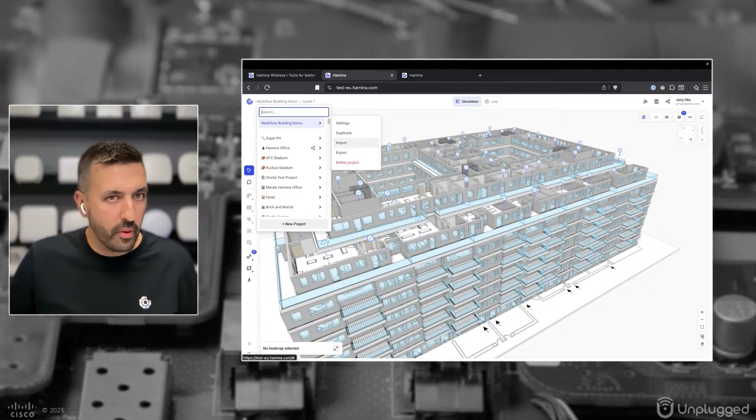Yeah, how about I share my screen instead of just talking about it, and I can show you some of the integrations we've got. To your point, we've had both on the import and export side for quite a while now, being able to import information from things like Cisco Meraki, but now we've added things like Catalyst Center as well, where we can pull in information from there. Probably what's most exciting is really on the live integration side.

Let me actually just do this—I'm going to start a new project here, and we're just going to show a quick demo of this latest and greatest integration. If I go to the live side, you can see we can tap into all these data sources from multiple vendors, but Meraki and Cisco specifically here. What I want to particularly show off is this latest integration with the Catalyst Center side.

This is actually our first integration with something that's not just in the cloud, right? So this is where things get pretty interesting, where we can tap into information from a Catalyst Center deployment and be able to pull in all sorts of information. I've already got this plugged in, but I'll go ahead and pull in a site here, and let's take a look at one that'll have some live deployment.

So this is a real live deployment. In addition to that, I'll also pull in my Orb integration here, as we do have some additional insights that we can pull in from Orb now. Not only that—one of the things that's unique with Hamina is maybe you already have access to something like the information that's in Catalyst Center, but we also want to pull in information from other data sources, like some type of sensors that can also be overlaid into these heat maps.

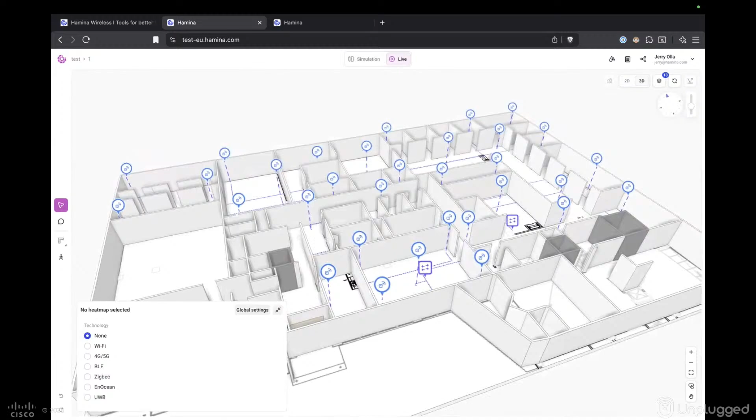So the floor plan lived in Catalyst Center. We pulled that in over the APIs, and now we can start using kind of the Hamina magic, if you will, to start building very detailed heat maps based on those floor plans.

So you can see all the different... and you mentioned this once before, that could just be a JPEG, right? It doesn't have to be a detailed CAD drawing or anything like that, right?

Absolutely. So this is kind of the different side of it—this is already an existing deployment, but we could do the same thing on the design side of things too, to actually do the initial design. But since this is already deployed, maybe we want to start from this angle of, okay, where are the gaps? Where are the issues? Where are users having a poor user experience? And we can drill down all the way into that level as well.

So if I go to the live clients, I can actually see we do have some clients connected to the network right now. And notice this one here in particular even has a score associated with it—that's coming from that Orb integration.

So if the clients themselves are running the Orb agent or Orb application, we can get some additional insights from what that user experiences from an actual user quality perspective. It gives a quality score of the connection - not just how the Wi-Fi is performing, but how the internet is performing at that site. We can take all that together and aggregate it down into a score.

But if I take this client, for example, this Chromecast, we can see this client is experiencing poor performance due to high retries. So we're seeing all that, and again, we're learning all this information in real time from this Catalyst Center deployment. This is a live deployment with actual Wi-Fi clients connected, and this is how that client is being reported to us by the infrastructure, in this case by Catalyst Center.

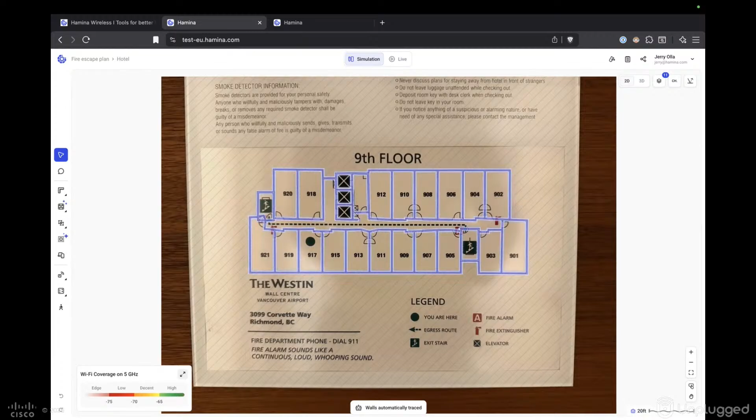Check this out - if I just pull this in, it understands it. In the past, not that long ago, you needed to have some very complex floor plans with layers and CAD files, all the PDF layers. Now, even just a photo of a fire escape plan provides the same kind of results in the sense that it interprets that as a floor plan. It understands that object is an elevator, that object is a door, that object is a wall. So literally just with my iPhone, I took a picture of the back of my hotel room door, dragged and dropped it into here, and you can see that quickly I'm ready to start simulating RF and placing access points, seeing how different objects and different placement of that access point is going to impact the signal propagation.

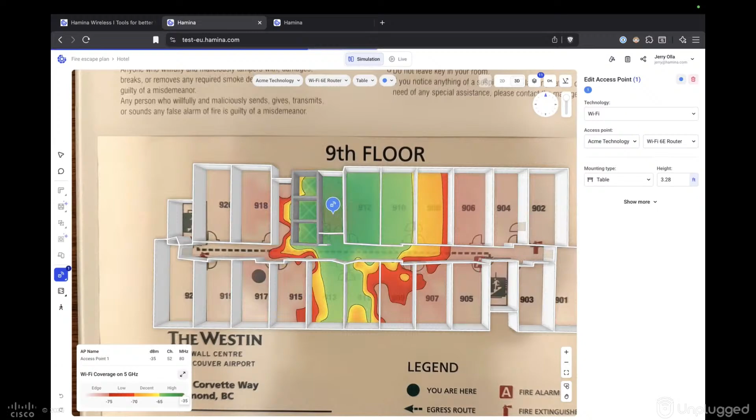Look at that, it looks like it even got the elevators and the materials, yeah, exactly. Pretty impressive. And you can see how impactful those elevators are to attenuation in your design.

And you know what, this is a great example because this happens - I've done this before, using the fire plan because you don't always have good CAD drawings or something like that. You'd be surprised how many people don't have those drawings or those files. Yep, agreed.

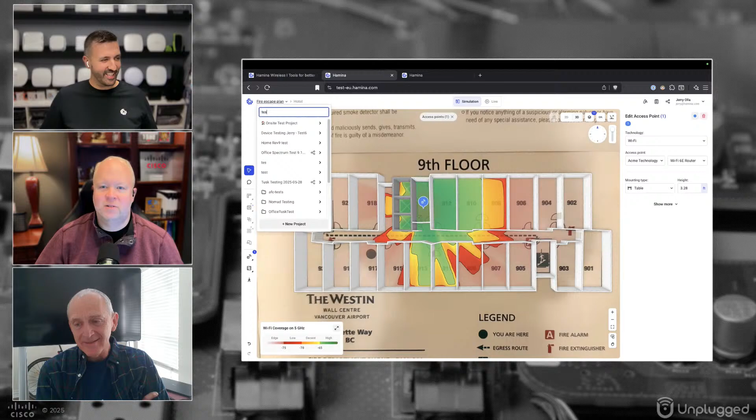So let's say we take our live data. Everything's working fine at the site, but we want to simulate making some changes, maybe from a refresh standpoint, maybe adding some new technology, like exploring using ultra wideband here for location tracking, or maybe a private cellular.

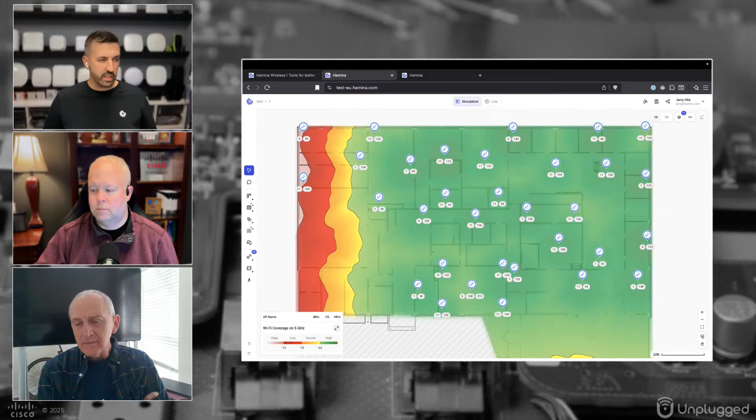The cool part is all of this information we've learned about this site, we can now use to do all sorts of things. I like to call it the sandbox. So we can go from the live view to now the simulation, and we're playing in the sandbox. We can do really whatever we want.

We can get creative. Our existing AP model right now, we've got some older 3802Is. Maybe we want to simulate swapping those out with something that has a UWB radio. Right now, if I look at our UWB coverage, we don't have any, because we don't have any technology that supports UWB in the space. But what if we just simulate ripping everything out and replacing it with some new ones.

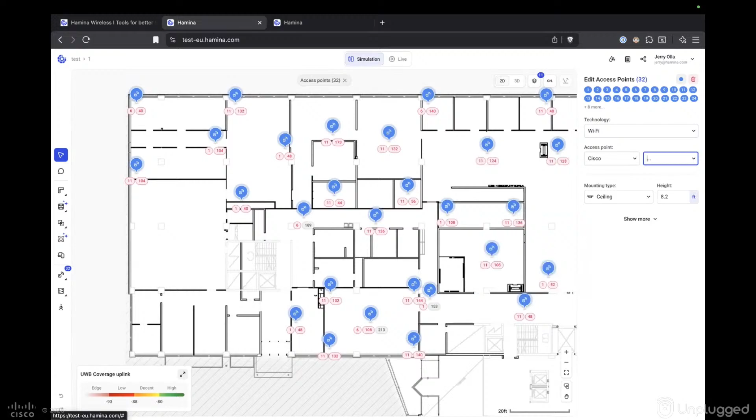9178s. And as soon as we put in 9178s, look at that. Now all of a sudden we have UWB coverage, and actually pretty decent UWB coverage throughout this facility. If we just do a rip and replace, we can get some pretty good ultra wideband coverage, and now we have a whole new technology we can use.

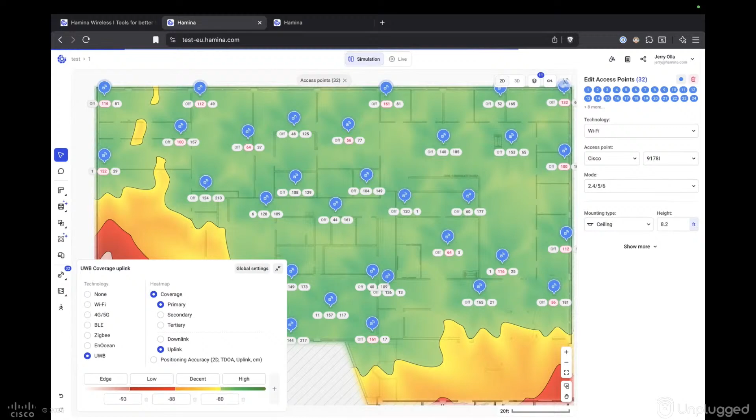One of the other things we can visualize is the positioning accuracy. Most likely, if you're utilizing something like ultra wideband, you're going to want to get down to that centimeter level positioning accuracy for some type of tracking. And now we can actually see that.

Based on the density of the access points we have in this environment and how open it is, we can see we can get centimeter level accuracy in all the areas where it's green.

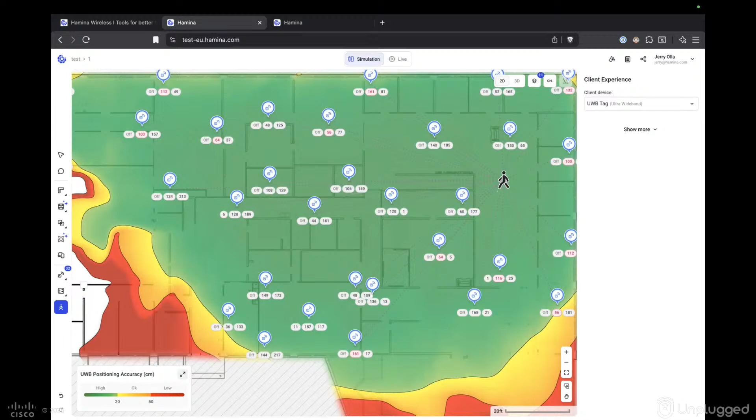And if we want to visualize that even further, let's throw in a UWB tag to simulate what that looks like from a triangulation standpoint, as far as how many different anchors it's going to be able to hear.

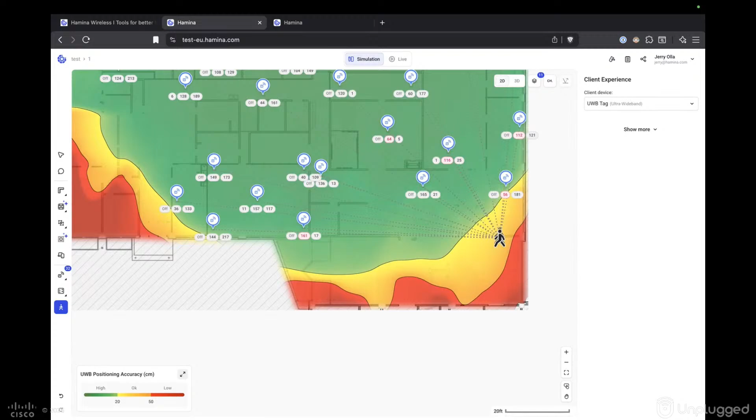And what happens when this device, whatever it is we're tracking, moves into an area where we don't have as many APs audible, we can start to see this ghosting effect happening with our tag, to see how much variance we'll see in that location and how that drift starts to happen in these areas.

So if we really need that location accuracy in this part of the building, we can simulate adding an additional 9178 into this area to help improve location accuracy, all the way down into this corner of the building.

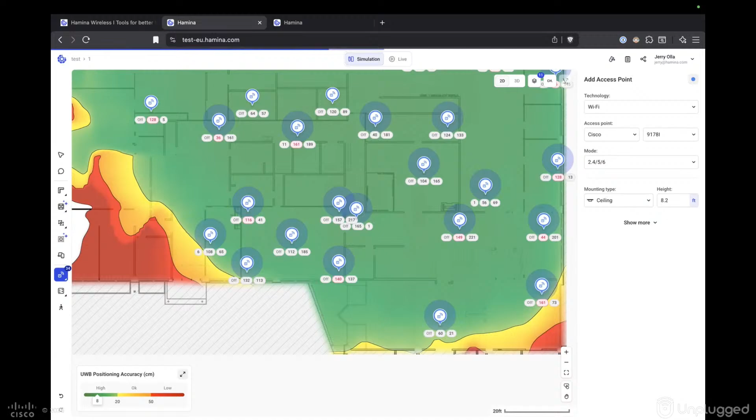But typically, if you haven't worked with UWB, what I've heard is you want to have at least, very minimum, 3 anchors audible in each of these areas, line of sight audible, and then 4 or more is optimal for really good location accuracy.

So yeah, something to keep in mind if you're going to start considering some of these newer technologies and looking at wanting to simulate that.

The cool part is we're playing in the sandbox. We can do whatever we want here. It's not costing us anything. We're not ordering equipment at this point. We're figuring out what it's going to take.

We can very quickly create a bill of materials and figure out exactly how many access points it's going to take. And in addition, we could input where our switch locations are, and start connecting everything to our switches to figure out how much cabling and things like that we're going to need as well.

If I do a connection to our switch, we can quickly see how much power we're going to need, how much cable we're going to need for this project. All that gets added up into that bill of materials as part of that process.

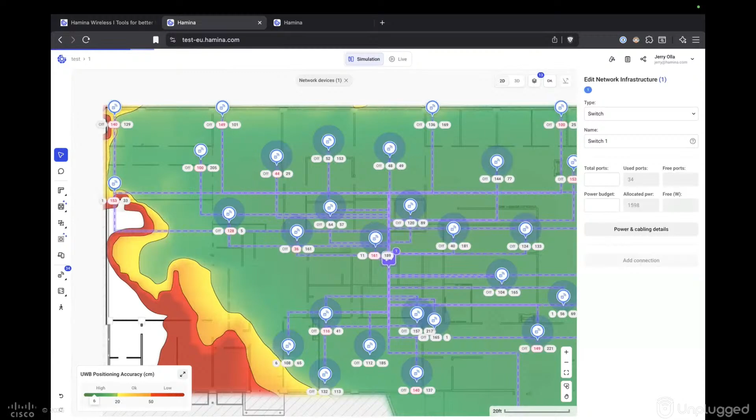So very, very quickly we can run through multiple scenarios. UWB is one consideration, but maybe you're considering BLE technology for that location. Does that get us enough location accuracy? Do we get tertiary coverage? All those kinds of details.

But then, yeah, even things like Zigbee. What about private cellular? I know, Al, we've talked about private cellular before. Is that something that you guys are seeing?

Yeah, we have an offering. Cisco's an offering. It's a hosted offering, where you own the core part, and then we host all of the management of the network, or our partners do. We see that as a really complementary technology to Wi-Fi. In the early days it was sort of like, hey, it's going to be one or the other. It's like, no, they're completely separate use cases.

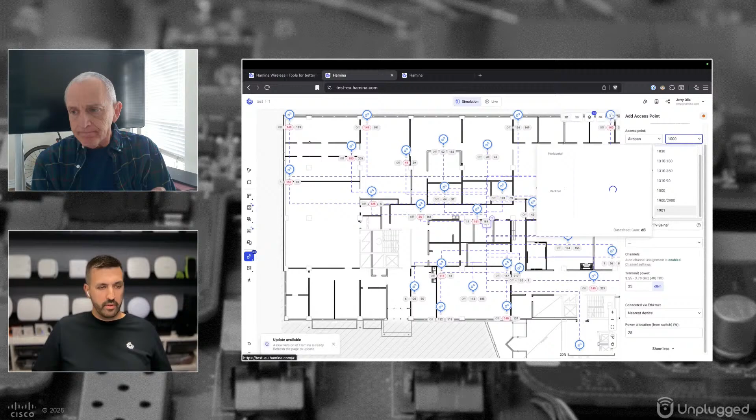I'm curious what you guys are seeing on that. What I've been seeing is, I totally agree, it's complementary. A lot of times it's because the Wi-Fi is so heavily utilized. Where can we get some additional spectrum? And not just additional spectrum, where can we get a QoS type Wi-Fi connectivity, something that can guarantee a certain performance and reliability, where Wi-Fi, being unlicensed, has to contend with all this other technology in that space. You don't always have full control over that, where something like private cellular, it's wireless, but it's not Wi-Fi. It's this kind of soft licensed frequency where you have more control.

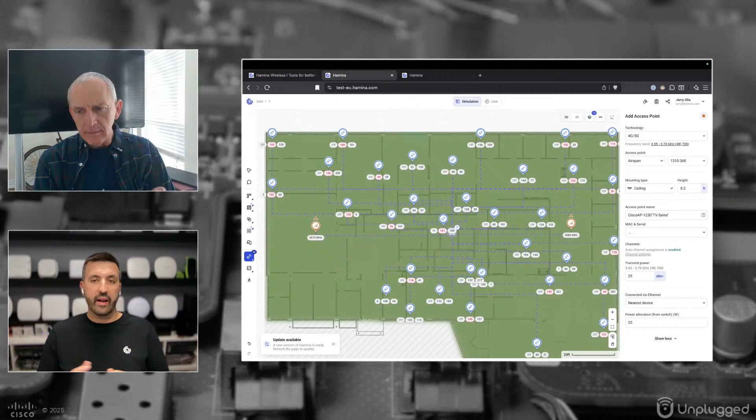You can kind of guarantee a certain quality of service with that wireless connectivity. So thinking of something like a point of sale system, you may want to offload it from the Wi-Fi side to private cellular while keeping your guest users, laptops, and things like that on the Wi-Fi side. Yeah, exactly. We see this in medical areas, large public venues, sort of things like that you were talking about.

Yeah, and I think what's pretty cool is when we add in all the walls and doors and everything like that here, you'll see when I place a cellular radio, the coverage of one cellular radio in comparison to one Wi-Fi radio. In this environment, one cellular radio covers about the same as probably 6 to 8 Wi-Fi radios.

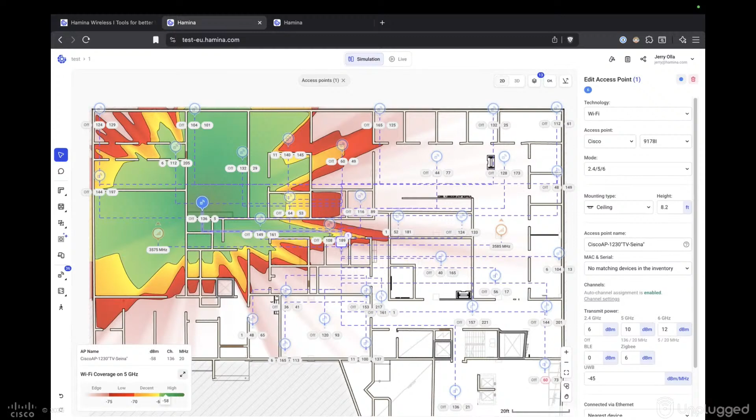And obviously with Wi-Fi, we're designing for different things. We're designing for capacity, not so much coverage. But usually with cellular, because we're going to have a lot fewer clients on the cellular side, we tend to design more for coverage than for capacity. So it's not like you're doubling up the number of devices in the environment to provide both private cellular and Wi-Fi. It might just take a couple of private cellular radios depending on the space you're covering.

And now you get a whole additional chunk of spectrum that you can dedicate for those certain critical devices. What I like about this is, somebody's looking at it saying, well, what would it take to do this? You can place these on the map in a matter of minutes and get an idea about what it would take. Once you've set up this project, as I've shown here, you're talking very few clicks, very few minutes, if anything, to get it set up. And once it's set up, you can simulate these different technologies really quickly to figure out the exact right solution before you go through any costly expenses of running cable and hanging equipment, then realizing it's not the right solution or we need to add private cellular later on. You can figure all this out on the front end.

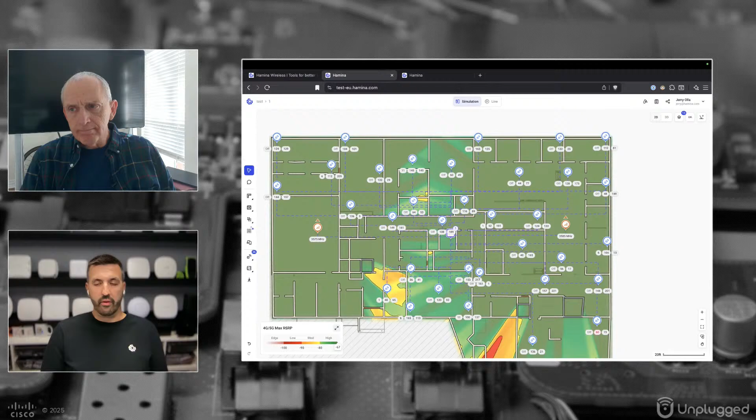We had a couple questions on a couple things we've covered already. How do you connect Hamina to Catalyst Center? Is that process quick, or can we talk about that a little bit? It is pretty simple.

So to get Hamina to talk to Catalyst Center, it talks directly to Catalyst Center over an IP address. We do have documentation about ports and IPs that you need to allow to talk to your Catalyst Center. Then it's just a username and password to allow that communication and the API connection to happen between Hamina and Catalyst Center.

On the Meraki side, it's even more straightforward, being that Meraki is in the cloud. You're talking literally just a dashboard API key. So you generate that dashboard API key from your Meraki account, choose which region you're on, and you're good to go. Very straightforward. When it's cloud to cloud talking, it makes things very easy. When you've got to go cloud to something local, then there's probably some firewall rules and things like that that have to be implemented to allow those IPs to talk to your instance.

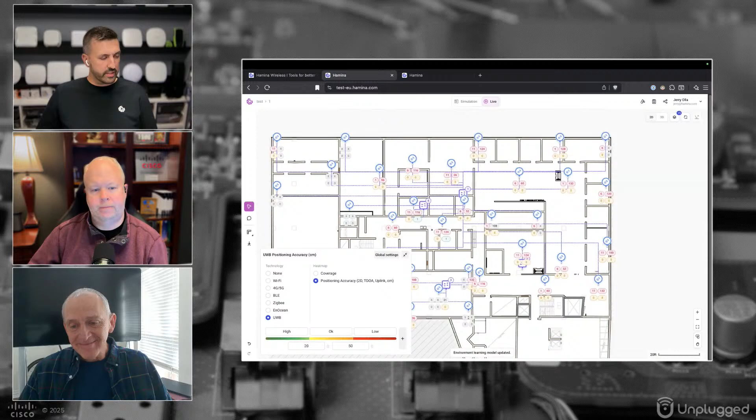Good question. So if we come into here, we can look at this from coverage or for positioning accuracy. Going back over to the simulation side, if we go into our channel settings, we can go under ultra wideband to choose those different frequencies. So we do support channel 5 as well as channel 9 that you can simulate.

Let's actually see if we switch from channel 5, which is using about 6.5 gigahertz, to channel 9, being on almost 8 gigahertz. Let's see how that does change things. And you can see, going from 6.5 gigahertz up to 8 gigahertz does make a pretty significant difference as far as coverage goes, as well as for positioning accuracy.

So there is some consideration there about which frequency, which channels you're going to be using, depending on the technology, depending on the tags, what they support, those kind of things. So yes, you can simulate those different supported frequencies.

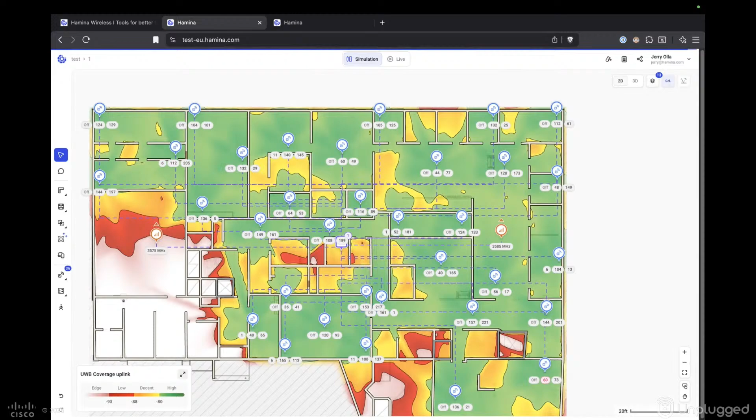Nice thing is it's out of band, so it's not interfering with your Wi-Fi at all. But the bad thing is propagation loss is a little bit more.

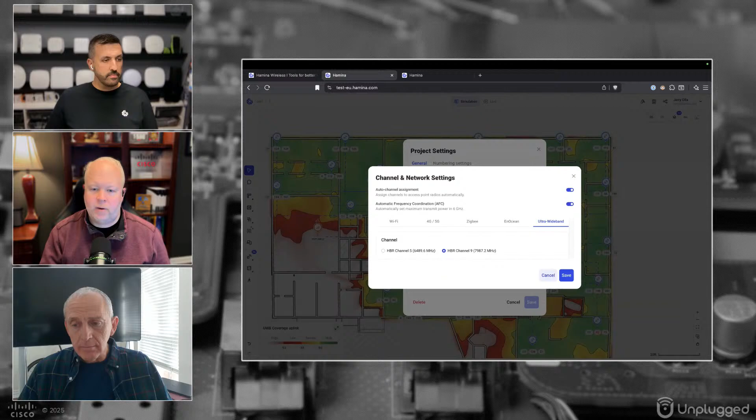Just to be clear then, the Cisco APs that include UWB, are they covering both bands? I'm only aware of the higher band. After seeing this, now I'm thinking I need to go back and look at the data again and see if I've got the data sheet right, and make sure that's the case. But I was aware of it being the higher band. That's a good question.

I suppose it probably depends on both the vendor side, making sure it supports which frequencies, and also on the tag side, which frequencies does the tag support.

Great question, I learn something new every time here. Oh, me too. We'll find out and let the listeners know, and maybe we'll open up the next show and let them know at the very beginning. Well, we can put it in the show notes too, under the episode.

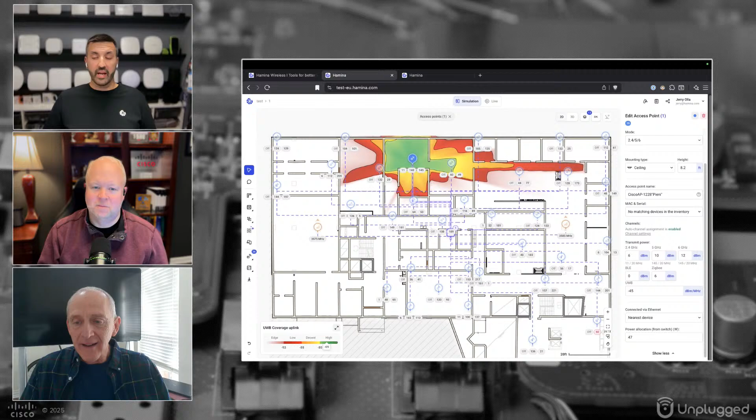Yep, sounds good. What I've found with UWB though is, because of this high frequency, it is very much like line of sight. If you have a lot of walls and doors and things like that, it's not going to penetrate through that kind of stuff. You need to have a very high density of access points with these anchors, and they all need to be, for the most part, line of sight with each other, because as soon as that especially 8 gigahertz signal passes through one of these walls or objects, there's not much coming through the other side.

Where I see UWB, it's more targeted. In other words, I don't need centimeter accuracy walking down the hallway, right? But I may need centimeter accuracy if I'm trying to gauge something from a manufacturing standpoint.

A use case is like if nurses or doctors going into the OR have to scrub for a certain amount of time, I can document that with that sort of level of accuracy. There are things that can be documented that need that precision, but not everything needs centimeter kind of precision.

You can adjust that as well in the requirements here. If you do have a specific level of accuracy, these thresholds define it: anything green is within 20 centimeters of accuracy, 20 to 50 is yellow to orange, and anything above that 50 starts to go into red. But if you don't need that level of accuracy, you can adjust these knobs.

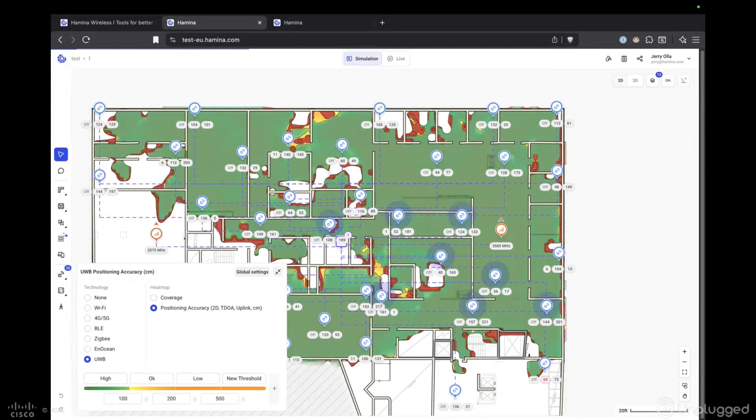So if we were to increase this to like 200, and let's say 100, you can see kind of what that ends up looking like. That's cool, yeah, this is a lot of fun to play with.

Because you have to be a little bit more precise with this. You're saying, hey, I want that level of coverage in this area or that level of accuracy in this area, and you have to be a little more precise with placing your APs. Wi-Fi maybe is a little bit more forgiving - you can move it to that side of the room or this side and still cover the whole room. But ultra wideband, you got to be a lot more conscious about where you want that higher level of coverage.

I like that it's fun to play with, because that's what I've been having a lot of fun playing around with UWB. I'm not a UWB expert by any means, but I think it's a very interesting, very new technology, and coming from a Wi-Fi background, it's interesting to see the similarities and major differences when you start dealing with these higher frequency technologies and location accuracy.

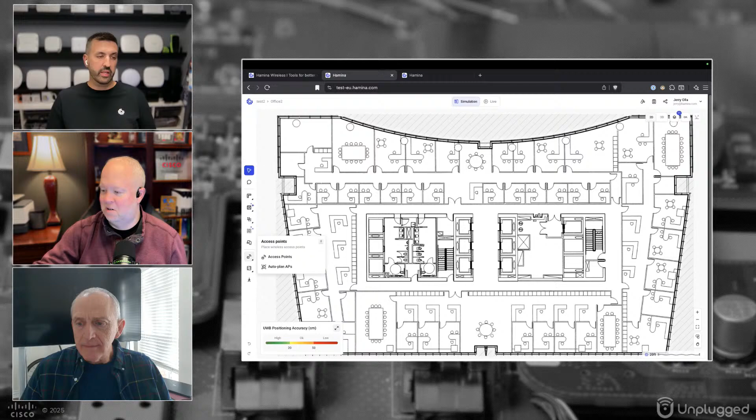I think that's what's really powerful about a tool like this - you can simulate and play around in the sandbox to figure out, hey, is this at all in the realm of possibility from a budgeting standpoint or anything like that. Very quickly you can start to really understand that technology and visualize it.

Let's do a quick design of this office type environment with some elevators and a lot of rooms to show you that point. I'll use the 9178s because I want that UWB radio, and let's design this for good Wi-Fi coverage. So right now this is simulating a good Wi-Fi deployment - we have good Wi-Fi everywhere, good seamless roaming throughout this environment.

What does that look like when we go and look at UWB for something like positioning accuracy? You can see, in a very walled environment with elevators and all that kind of stuff, you're not going to be able to just rip and replace your Wi-Fi APs with 9178s and get location-based accuracy. You can see how bad that would be from a centimeter level kind of accuracy.

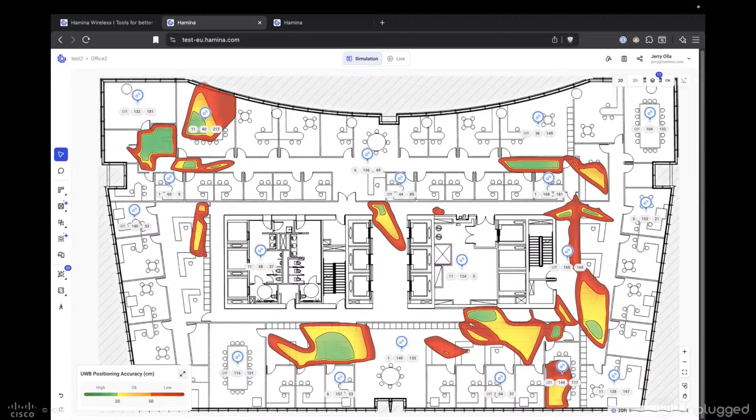Now if we look at it from a Bluetooth standpoint, for something like tertiary coverage, we actually don't look too bad. This is like what we've been designing for as far as location stuff for a while now, and this might be good enough - maybe you don't need UWB, or just a few more access points, maybe. Not a big difference in the design, right? Depends on the use case.

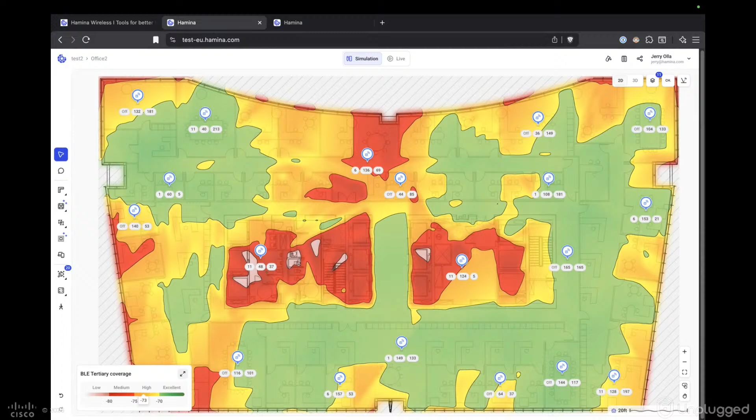Yeah, it's fun to play with. Remember when you guys first released it as a beta feature? I went to it right away because it was a lot of fun to play with. Yeah.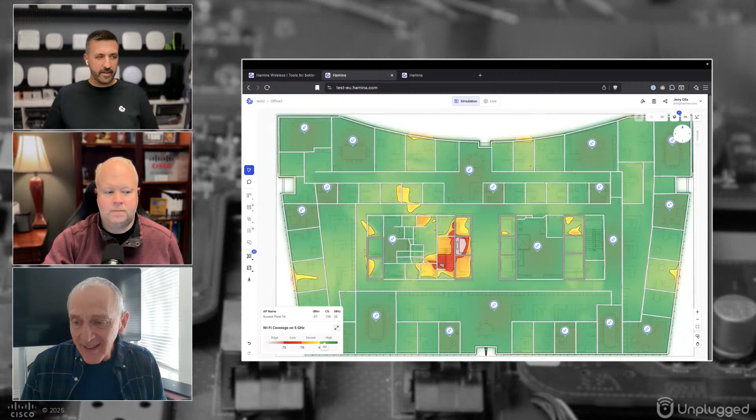I could show you a couple other scenarios on the AI detection features and show you some of the latest and greatest there, if there's interest, or I don't know if we have any other questions before I change gears here. Yeah, that sounds good. I don't see any other questions right now. Okay, let's do this then.

So I want to show you guys some of the latest and greatest in the AI detection side of Hamina. We showed walls, doors and objects, but some of the other things we've added is like we'll do a data center. If we choose data center here as the environment type, that's going to tune that AI detection to look for specific things related to that.

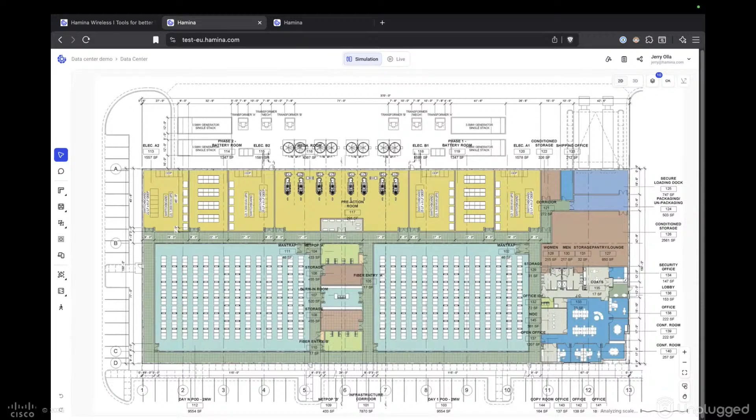So now if I come in here and grab our data center floor plan — again, these are just floor plans, just Google search for data center floor plan, nothing special about these. Really any floor plan works for this. These are not layered floor plans, they're not CAD files or nothing like that.

But it's one of the first things you'll notice it did. If you're paying attention, you can see these little notifications of all the stuff it's detecting. The first thing in the bottom right corner — I'll make the text a little bigger — you can see it detected the scale automatically. So once it does that, it has a good reference of what it's looking at from an object standpoint, once it knows the size and scale of this stuff.

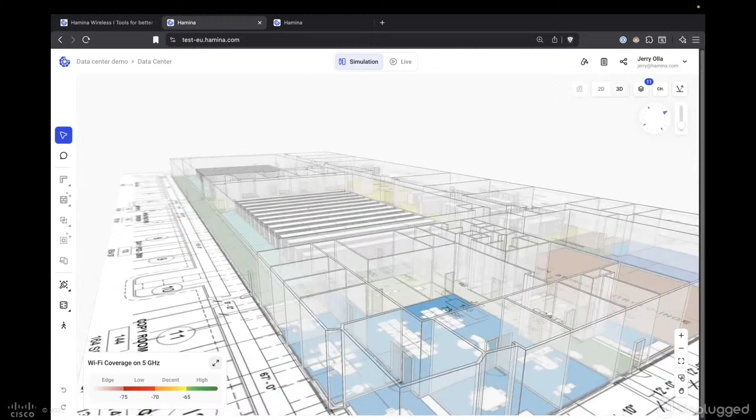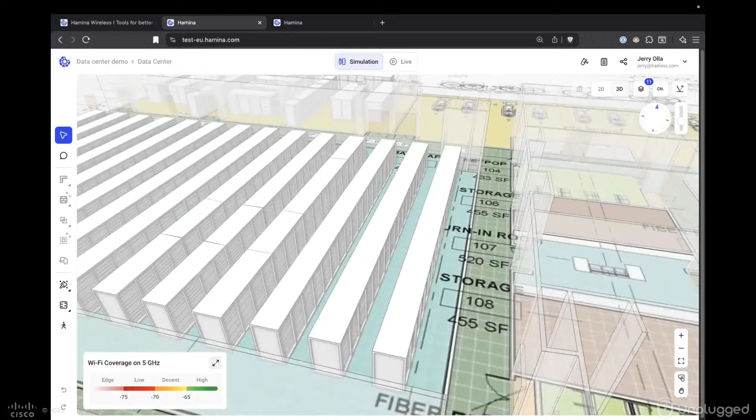Now if I go into the 3D view, you can really get a grasp for what all it's picking up. We can see it detected things like walls and doors like we already looked at, but one of the other things it detected was all the racking in here for the server racks, right? So obviously stuff you would commonly have in a data center. It's also appropriately sizing these to what a typical rack height would be for these kinds of environments. So it has a lot of intelligence in that sense of knowing what the default height and attenuation and things like that are for these kind of objects.

And really that quickly, all I did was create the project, drag and drop the floor plan in, or selected it from my list. And from there, if I want to just start placing access points, we can actually start to see how these access points are going to interact with this type of environment.

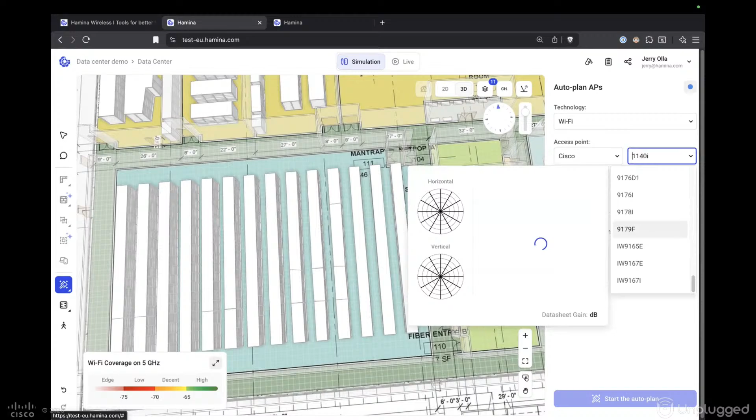And maybe even from there, if I don't want to manually place them, we could do the auto plan. Again, choose your specific model AP that you want to plan for, and you just hit start the auto-plan. And now it's going to go through and again use some intelligence understanding these objects of where's going to be some good places to place these access points.

By default, it's going to use industry best practices for looking at things like how do we make this network make sure there's going to be seamless roaming throughout the environment, as well as making sure there's good redundancy — meaning if any of these APs were to go offline for whatever reason, or maybe become overloaded with too many users, making sure there's at least 2 or more access points in any of these areas to ensure a good seamless experience for any type of users, whether they're stationary or roaming through the environment.

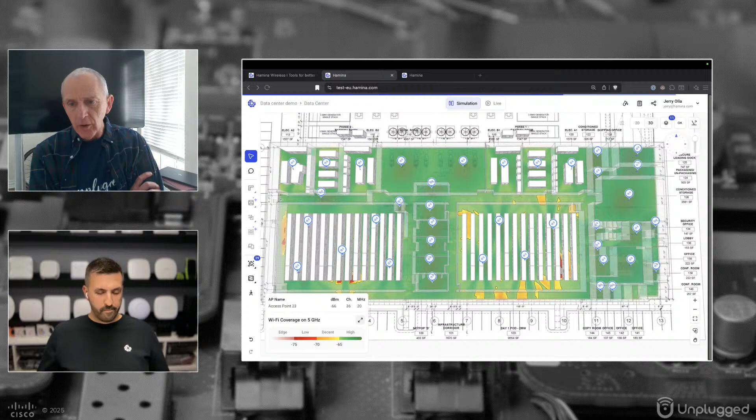How do you typically use this? Is this a fire and forget kind of thing, or do you typically say, hey, this is a good starting point for me, now I may need to add some, because it wouldn't necessarily... Let's say this was an area where you had a ticketing area or something like that, like you were talking about earlier — it may not know that, right? So you may want to augment. Is that how? I don't know, what do you think? Is it?

Yeah, no, I would totally agree. I usually use this as a good starting point — for very few clicks, very little effort, I now have a rough order of magnitude of how many access points it's going to take for this type of a project. But no, this is not like print this off and hand it to an installer and say go install these APs in this location.

There's still some checks and balances that need to happen here. I haven't even figured out how we're going to cable all this, how we're going to power all this. We need to factor in all those details still.

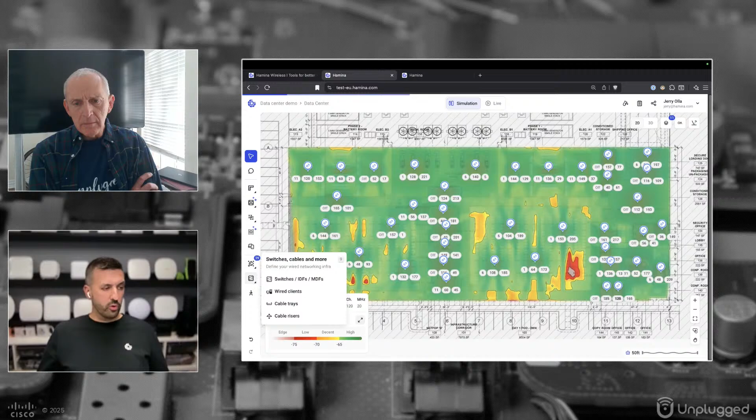But this at least gives me a very quick way to get a good feel for budgeting purposes, to see if this is in the realm of possibility before we go through and do a lot of engineering effort on this. But the cool part is once we're good with this, maybe there's a critical area that it missed.

Let's say this is some really high density area. We're going to be having some event, this is the event space or something like that over here, so I want to factor that in as well. I'm going to come in here and define a capacity zone, and we're just going to say we have like 150 iPhones and 100 MacBooks, just to put some numbers in here.

Now what I can do is just click and drag an area and say I just dropped 250 clients to all connect to the network in that area. And now that we've added that additional detail, this is not going to fly, right?

We've got over 100 clients connecting on our 5 gigahertz radio here. We do have only 39 on our 6 gigahertz, so the 6 gigahertz clients will be happy and okay, but any clients that are going to require to be on 5 gigahertz are not going to have a great experience.

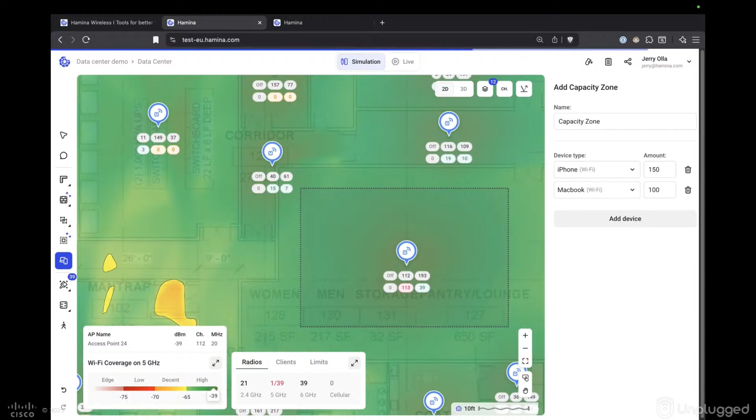So some things we could do is come in here and see if maybe we have a better mode we could put this AP in. Since we've got a 9176, it does support a 5-5-6 mode. So instead of right now, it's actually switched off and suggesting we disable the 2.4 radio, we've got a whole nother radio in this AP that we could be utilizing to help with that load balancing. Just by flipping this into a 5-5-6, we can see now we've got some better distribution of these clients.

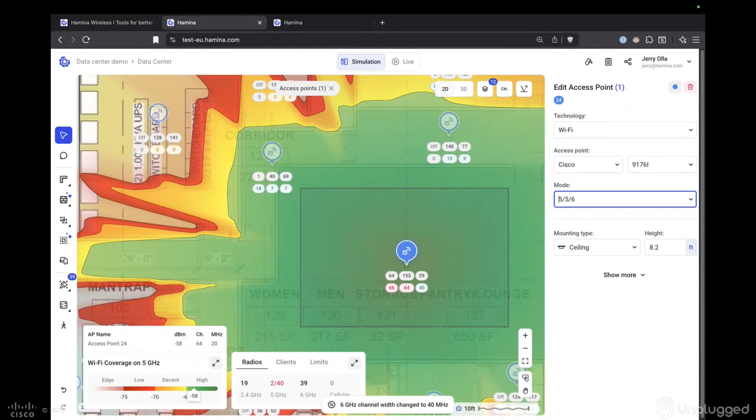You can see some of them moving around now. And maybe we want to do that with some of these other APs nearby that are going to support that. We'll put this one also in a 5-5-6, this one also, to get some of those 5 gigahertz clients. And now things are starting to look a lot better, but we're still over 60 clients here.

So let's go ahead and maybe add one more AP to this area. And I bet you, especially if we have one more AP and we kind of spread these out a little bit, looks like this is going to work nice right here.

So you can see it's rebalancing all the channels for me automatically. It's looking at what's going to be the most optimal way to configure the channels, the channel width, all this kind of stuff. Notice here, it did pick 20 megahertz channels for 5 gigahertz, but it does say we can use actually 40 megahertz wide channels on 6 gigahertz.

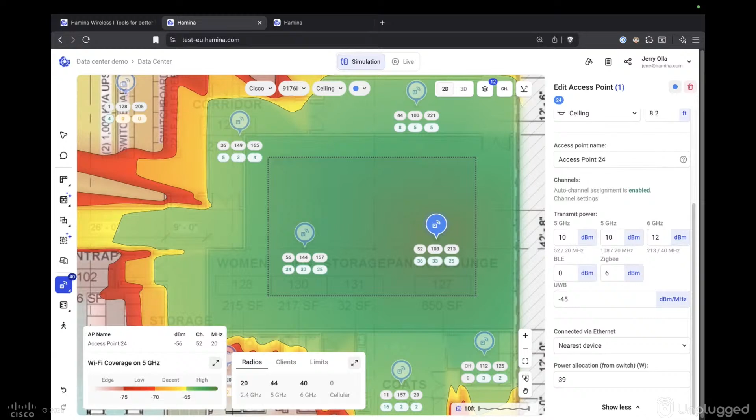It will automatically and dynamically, as I add more APs, you'll see eventually we'll get to a tipping point where it's recalculating the channels here. It's going to say we don't have enough spectrum on even 6 gigahertz to support 40 megahertz wide channels, and eventually it's going to drop down to using only 20 megahertz channels on 6 gigahertz as well. Let's see once it finishes recalculating the channels here. There you go, so 6 gigahertz channels now are switched down to 20 megahertz. That's all part of the auto channel assignment.

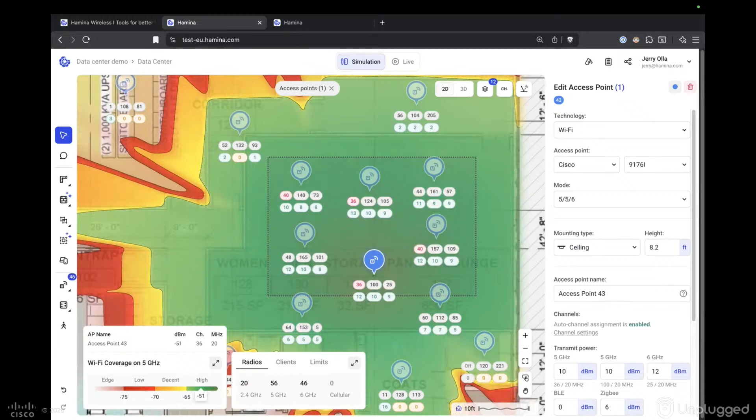So it's going to give you some suggestions on how you should optimally configure that deployment depending on how many APs and the environment and how separated they are.

We have a question also on multi-floor designs. So probably in a data center design, that's probably a single floor building, but office space or whatever, where we've got multi-floor, how do we handle that?

Absolutely, yeah, so we've had multi-floor in the tool for a while. One of the things that we can do is just stack those floors up. So I've got an 8-story building here, and we can stack the floors and we can see the signal propagation between the floors.

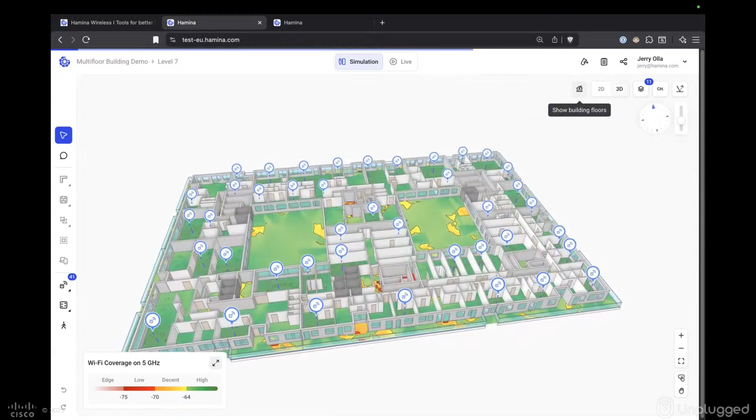I'll give you a sneak preview of something that's going to be released very soon. We've had this 3D view per floor, but one of the things getting released here is being able to show the building floors as well in this kind of, I was told recently, this is called a dollhouse view.

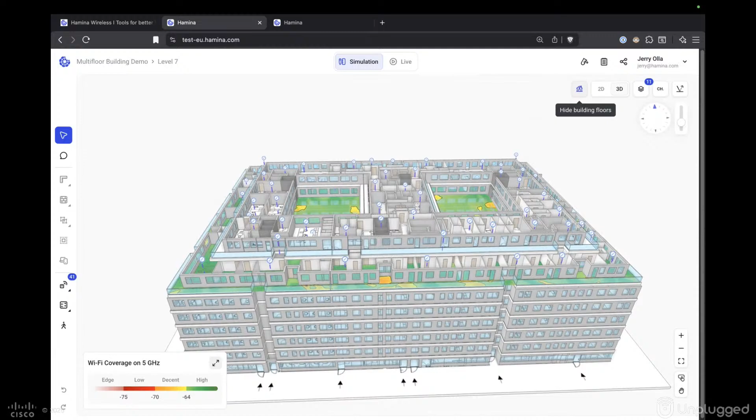This looks cool, visually it's eye candy, but I found it to be super useful. Think of complex environments like a warehouse where you've got multiple levels, mezzanines and things like that. It's really useful to be able to stack these up visually to make sure you've got things aligned, stacked, and spaced correctly. So this isn't just eye candy, it actually has real world purpose.

That's cool, I really like that. Wow, I think they'll get used a lot. Yep, yeah.

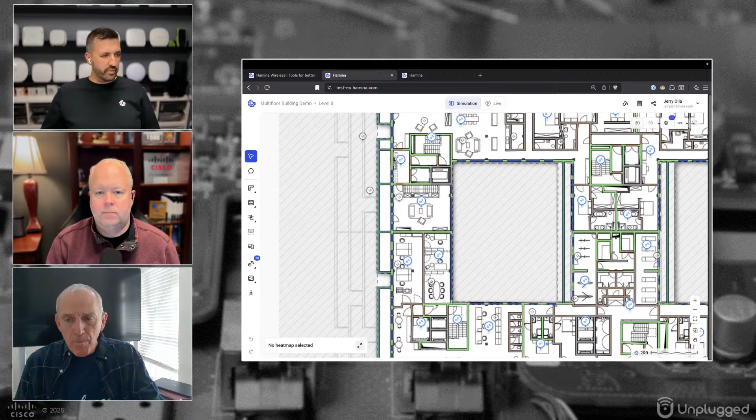If we wanted to see just signal propagation between the floors, for example, if I go up to the top floor here, floor 8, we can see where these APs are on the floor below. If I turn on my heat map and click on this access point, I can see what kind of bleed through we're going to see from that AP installed on the ceiling on the floor below, up to the floor above. So we can see what that ends up looking like.

Wow, that's nice. Yeah, yep. But very easy to set up there. Did you align the floors with a marker or something like that?

Yeah, let me show you. If we do a quick multi-floor demo, can't type, but close enough. I'm going to pull in a floor plan that has multiple floors here. Let's do something like this. Here's a nice multi-floor.

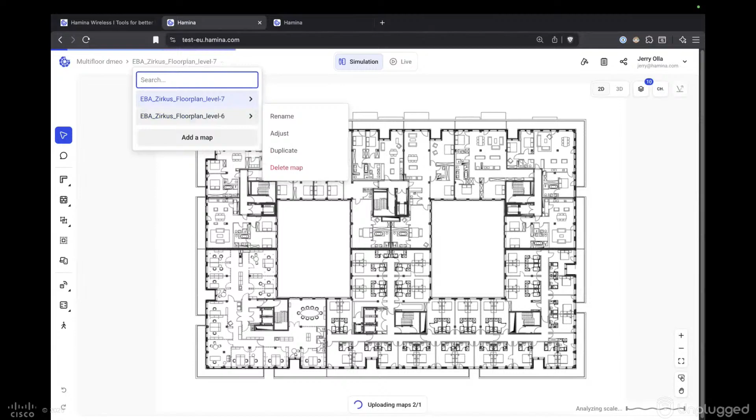Let's do something like this. There you go, you got something like that. We'll take floors 6 and 7 here. And if I bring those two in, the cool part is, I just select both those floors and it pulls both of them in. So it's brought both of those in now. This is actually the same building I was just showing you.

I'll show you how you stack those up. Walls automatically traced, scale automatically set. So right away I can go into aligning the floors. I can even assign the floors to the building here, and it has this auto align feature once it's finished computing the different floors. We can click that auto align, or I can just drag them and align them manually to stack them on top of each other. Usually I look for something like a stairwell or an elevator to align those.

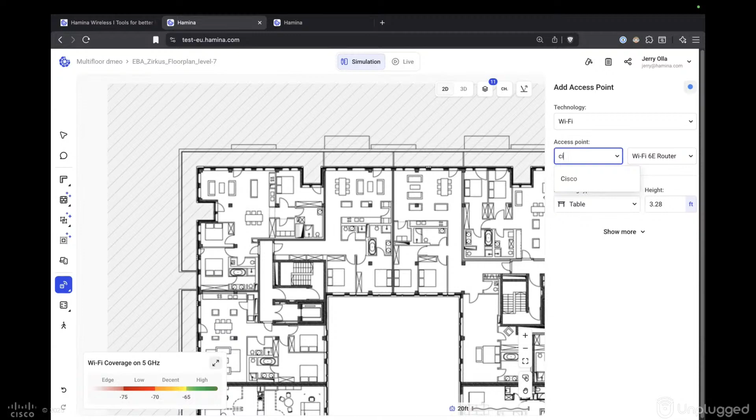Now that those are aligned with each other, we can define things like the ceiling height and the attenuation. If I take floor 7 here, which is the top floor, let's place one access point in here, I'll put one on the ceiling. Let's take our 9178, put that on the ceiling. Now I'm going to drop down to the 6th floor, and notice immediately we see that signal propagation. It also shows me a little icon saying this AP is on the ceiling on the floor above.

Yep. And did you scale each drawing separately, or does it scale everything at once? All auto magic.

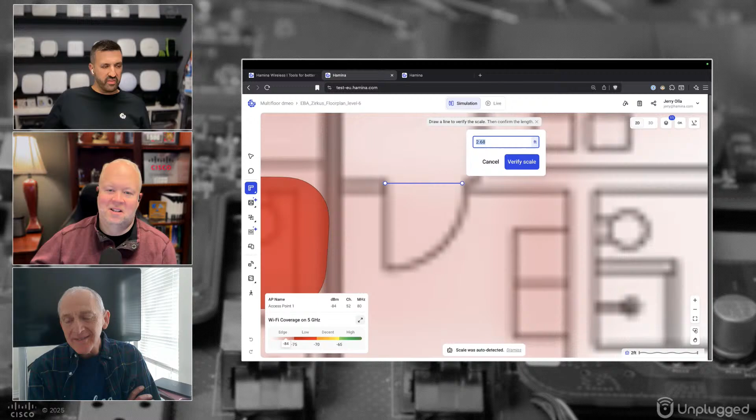So now I can verify it. I could click the scale button here and say, something looks off. I like to cheat a little bit and use a doorway, which I don't recommend for scaling a map, but verifying it this way is acceptable. Basically what I'm looking at is, is this about 3 feet? If it's around 3 feet or 1 meter, then I know the scale has been detected correctly. And these are residential, so it's a little smaller than 3 feet.

In more commercial settings, you'll probably see more standard 3-foot doorways. If we take one on the hallway here, you can see it's right on at 3 feet.

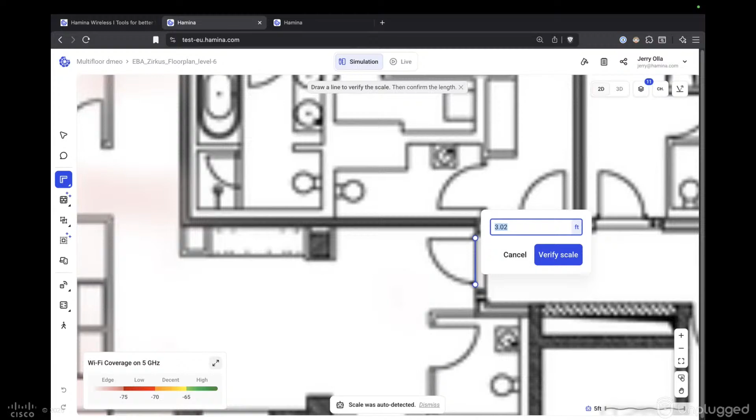That's actually a good example of why you never want to scale to the doorway, because some people assume doorways are about 3 feet. If we scale it to 3 feet using one of these interior doors, like a bathroom door that's only 2.5 feet, that's a large error in our scale. That could really throw off the number of APs, the AP locations, and all that kind of stuff. So scale is very important.

That's why we've implemented this auto scaling feature that scales it for you, because we've seen so many user errors of people not scaling a map correctly. Then they either over-engineer the design, putting too many APs or too few, just because the scale was off a significant amount.

It's kind of a percentage thing, right? If you're measuring a large area, a small percent deviation isn't that significant. If you're measuring a small area, that same percentage of deviation makes a big difference.

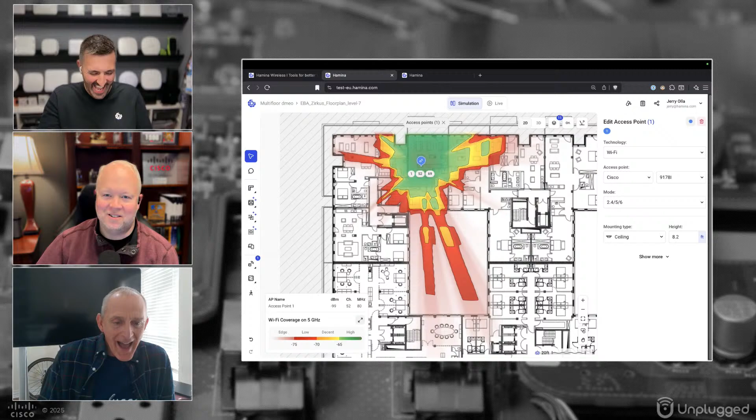Anders has a feature request here for you, Jerry. He wants to be able to export this building to Doom or Counter-Strike. Knowing some of the folks we have on our product team, like Joel and some of these guys who are into the gaming side of things, I could definitely see that probably happening. If we could prioritize that one, that'd be good. Although, if you suggest that, you'll see that'll be the focus for the next couple weeks or months, and a lot of other important features will get delayed.

I think we're coming up on time, but I wanted to show off one more thing that is pretty exciting - I actually got a chance to do a survey. If we've got a few minutes, is that okay? Yeah, that's fine, that sounds good.

So this guy right here - we actually just did a webinar on this recently, last week with Hamina, on spectrum analysis. This is the latest and greatest in the world of spectrum analysis. This is a tri-band spectrum analyzer made by NetAlly, called the NXT 2000. What's cool is, as you can see, it's modular, essentially looking like a big USB Wi-Fi adapter.

So it does just plug in USB, which means I can plug this right into my laptop, or into something like an AirCheck here and do handheld spectrum analysis. That's what it kind of came out for initially. But we talked to the guys over at NetAlly, partnered with them, and added that functionality to our Nomad device.

So I'll show you - we'll work in reverse a little here - this is my NXT survey. I did a survey here and tracked down a couple of interferers in the environment that were broadcasting some signals. If we want to look at how devastating some of these signals are, we now have this survey explorer view where I can take my survey path. This shows all the APs and everything that were picked up.

If I take my surveyor and put it in here, you can see we're starting to see our survey data. If we look at some different paths of the survey - these are a couple different times - here's one. I picked this guy up and saw it on the survey path. If you look around channel 144, you see these really narrow spikes, really tall, really powerful spikes.

Yeah, that's that interferer. As I was standing right in front of it, you can see it picking it up in the amplitude, which helps me locate where that was in the building. So I can either look at this data as I'm walking around, or do my survey and then look back through it to figure out where I was when we saw that peak in power output, giving me a good clue of where it's located.

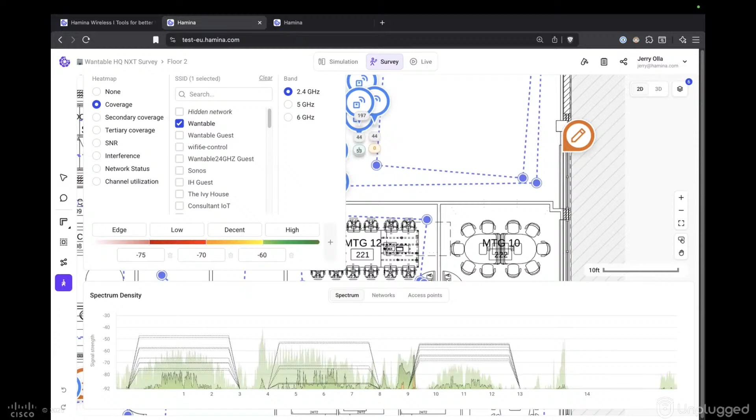I also saw some stuff on 2.4 in this part of the building. Let me switch over to the 2.4 side here. And yeah, if you look around channel 8 and 9, I was seeing some stuff here in this part of the building, and you can see some of those spikes here.

So Wi-Fi is obviously operating in channels 1, 6, and 11. We can see we do have some other narrowband type technology that could be Bluetooth or Zigbee, some spikes in there. But check this out, so yeah, this guy over here.

If I go look at my notes, we can actually see I did notate what this was. This was a little 2.4 gigahertz spy camera, an analog video camera, not Wi-Fi, but operating in that space. So that's all getting picked up on all the different bands.

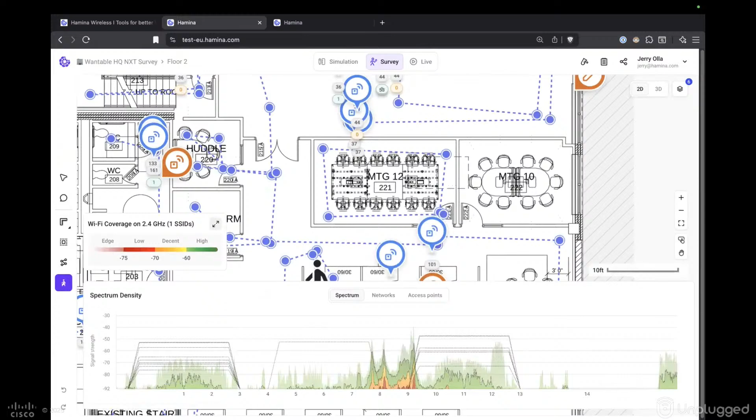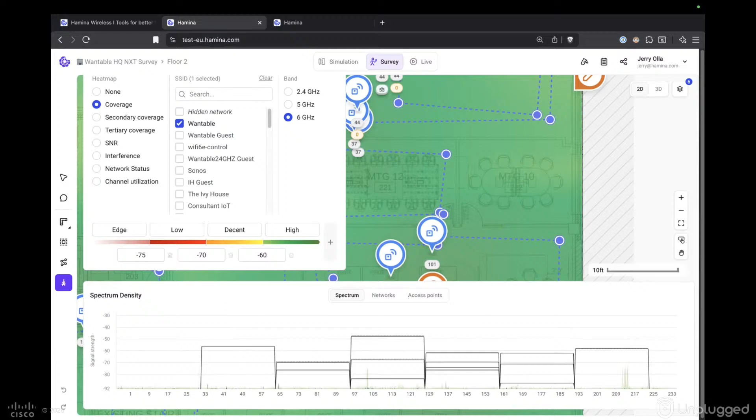If we look at 6 gigahertz, they did have 6 gigahertz deployed, however there wasn't a lot of activity on 6 gigahertz. You can see all their APs on 6 gigahertz, but notice along the spectrum, other than a little bit of Wi-Fi traffic, really nothing going on in 6 gigahertz throughout the building here.

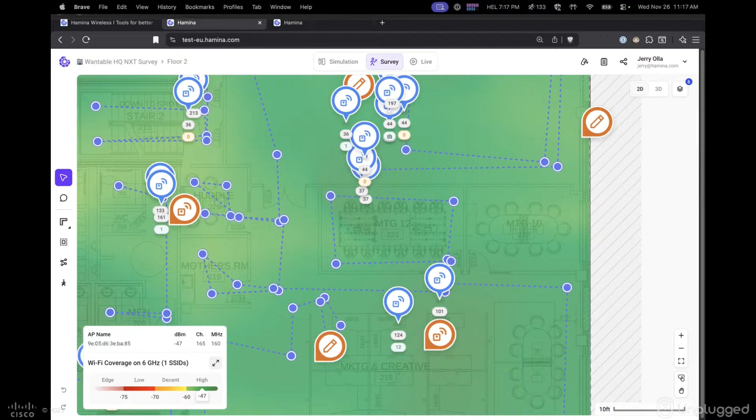And if you want to, I'll show you a little live demo just to show how fast that is. Let me pull that up.

One of my team members said that now he's even interested in a dollhouse along with his 4-year-old, based on the Hamina feature here. That's awesome. So update those gift lists, Christmas lists, or whatever accordingly. Export that to a 3D printer.

There you go, exactly. Let's see how that comes through. Yeah, sharing the phone, we can see it. Okay, so this is the Hamina on-site application. I have the Nomad device here plugged in. I'll rotate this into landscape mode, so hopefully that's a little easier for the viewers to see. That looks good, okay cool.

So now if we go down to the spectrum part of this, and I'm just using an iPhone 15, you could use a larger display like an iPad as well, especially for spectrum analysis, which might be particularly useful. The cool part is when you do your survey, it's going to record all this information and then we can play that back in the browser, so you could put it on a big, large 30-inch display if you really want to dig deep into the data.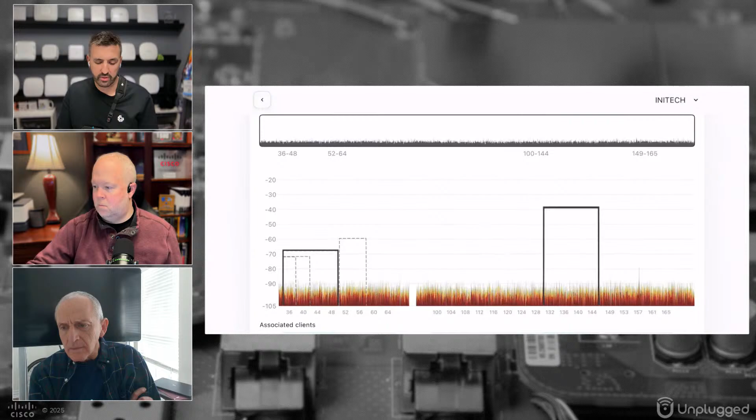And to be able to pick up even a very narrow interferer like that, you can pick up during the site survey. Does it display like resolution bandwidth, sweep times, that kind of stuff? I don't see that unless I'm just missing it.

On the data sheet you're saying, or on the Hamina display? Oh yeah, good question. We don't actually display the specific details about the RBW, like resolution bandwidth or the sweep time. It is very fast, I know that's on the data sheet. I don't remember what it is off the top of my head, but check this out.

If I take this, right now we're at a half a second time span. If I take this down to 0, we're actually going to show this in real time now, so you can really get a feel for how fast this is sweeping. So we're not holding any of this information, there's no hold time or anything here. It's just showing you as it's seeing any blips in that technology.

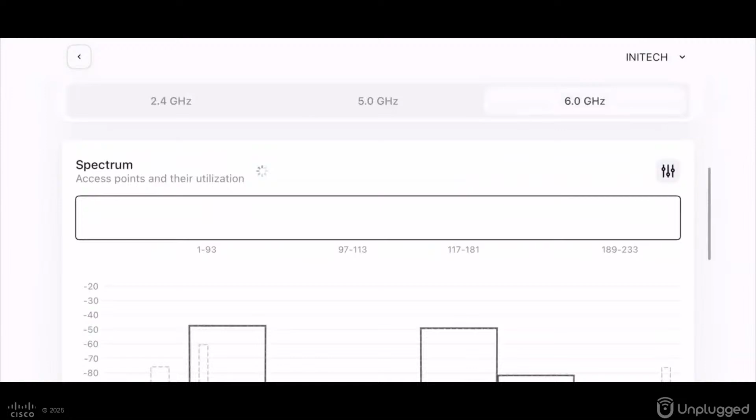If I go over to 6 gigahertz, same kind of thing. Now we're sweeping 1200 megahertz, but you can just see how quickly there's activity that's happening. Let me actually set the delay here, even there's 0 on here. There, yeah, so you can see the spectrum dancing there. And again, this is pretty boring environment.

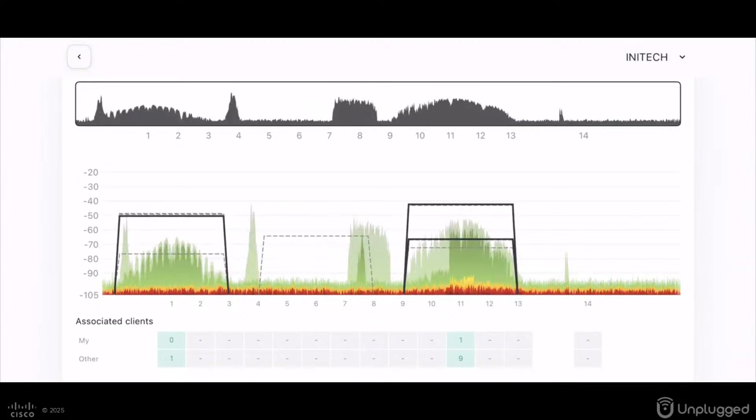If we go to 2.4, there's always a lot more interesting things to look at on 2.4, with my Bluetooth headset in, I've got a Bluetooth mouse, all the different kind of other technologies that we're going to see. And if we lower that down to 0 kind of hold timer, and this is even going across the screen mirroring, so I'm sure there's some slowing down and delaying, but it's very fast.

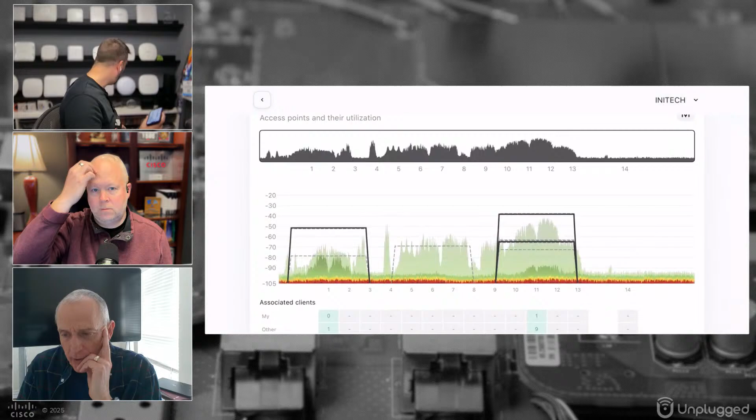Wow, okay. You can't change sweep rates or anything like that, right? No, you can't adjust it other than just the kind of hold timer on that. So that can help you if you're trying to locate a frequency hopping device versus something that's a constant transmitter on a specific channel.

I'll take one more, that same video transmitter that I showed you in the demo before. If you want to see what this guy looks like live, I'm going to turn this guy on, and you can see pretty quickly where that is on the spectrum. So this is what a video transmitter would look like, right? One, it's going to be very wide in the sense that video requires a lot of bandwidth, right? So it's generally not going to be that narrow transmitter like we were looking at before with the motion detection.

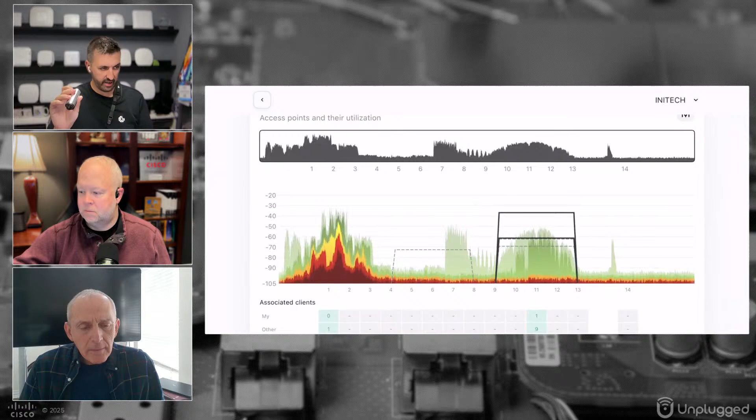So it depends on what technology is in the space. If I change channels here, you can see how quickly it picks that up. Notice even on channel 1, I was figuring this might be loud enough that we can actually knock out that access point. So that AP was showing on channel 1 before, but now with this continuously transmitting, it can't hear that access point anymore. If this was right next to the access point, it would keep it from transmitting at all, and likely that AP would end up moving to a different channel. But if I move it back to a different channel, we can see that AP reappears on channel 1, and we can see the details under the access points. This is all the information that would get gathered as part of that site survey process, which could then be played back as well.

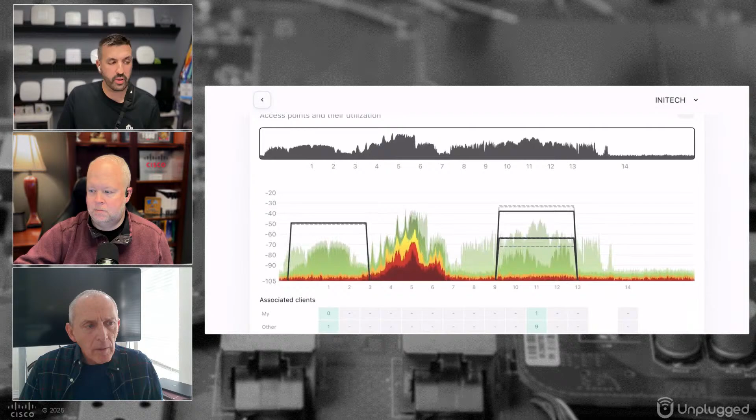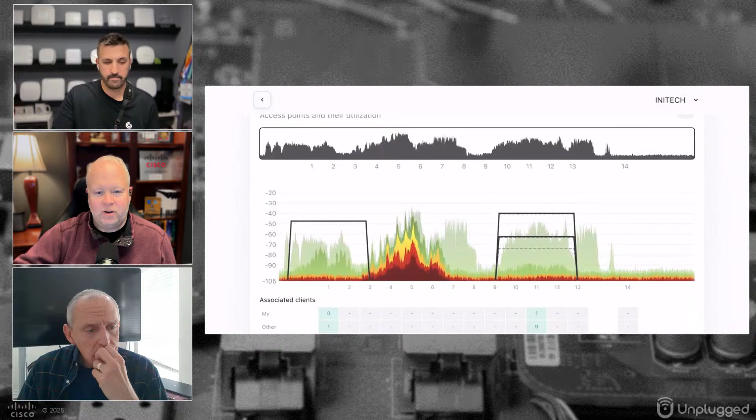Very nice, yeah. Someone shared a great addition in the comments - they had worked on trying to find an interferer for a new building install, where they determined the interference source was motion and occupancy detection built into the lights, wired right up into the light itself. They ended up contacting the electrician to go back and remove that after the fact. It's interesting - yeah, they can be pretty detrimental, especially if they're all over the place on every light fixture. I could see that doing some pretty big harm to a large chunk of the spectrum.

There's one last question too, an interesting one - is there any way to do scale diagonally? Like if you shot a laser across the building to the corner, is there a way to do both X and Y scale simultaneously? Maybe I'm not understanding the question, but we can absolutely do the scale diagonally. We only use one measurement for scale, but there's nothing that says we have to do left to right or top to bottom. I could absolutely do corner to corner and set the scale that way. I do that often because I want to use as long a measurement as I can if I need to manually set the scale. So for an outdoor thing or something where it can't auto-detect the scale, that would be a great way to do it. So yeah, absolutely, you can do diagonal for those measurements.

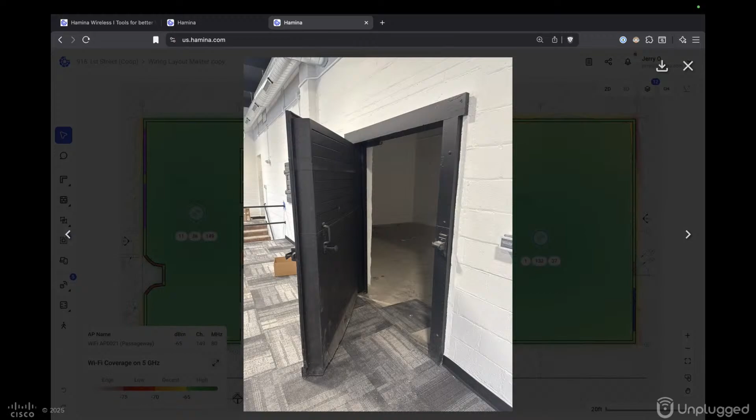One of the things we were able to do was run a survey once we got the APs up, so we could see how that signal was going to propagate through some of these walls and objects. What's really slick that Hamina does now is I can leverage that survey data into the simulation—we call it surveys to design, or surveys to attenuation. Without having to calibrate the walls and objects for the specific dBs of each wall or door, we can leverage that survey data.

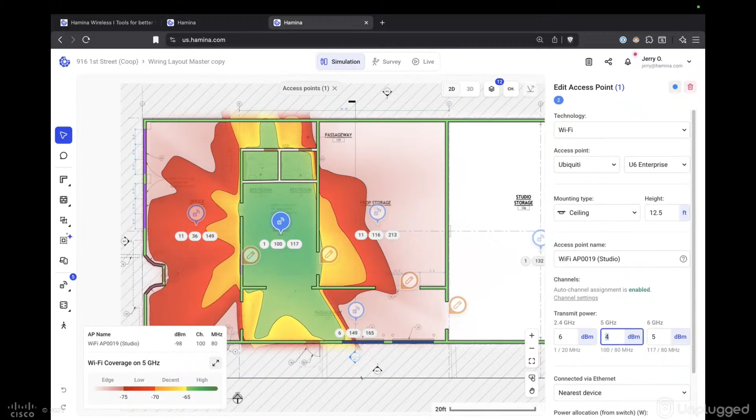Under the simulation prediction mode, I've set it to learn environment from survey. Now it will take that survey data and let us simulate different models of APs, different configurations, different transmit power, to see how that signal propagates through the space—leveraging all the data it learned about the environment as part of the site survey process.

All I had to do is walk around and do that site survey like normal, and it takes all that data into consideration of how the signal actually propagates through that space and those objects—so it automatically computed the loss through the wall, since that's already considered here.

Normally in the past you'd have to go in and manually tune those knobs yourself. Now we can actually leverage that survey data instead.

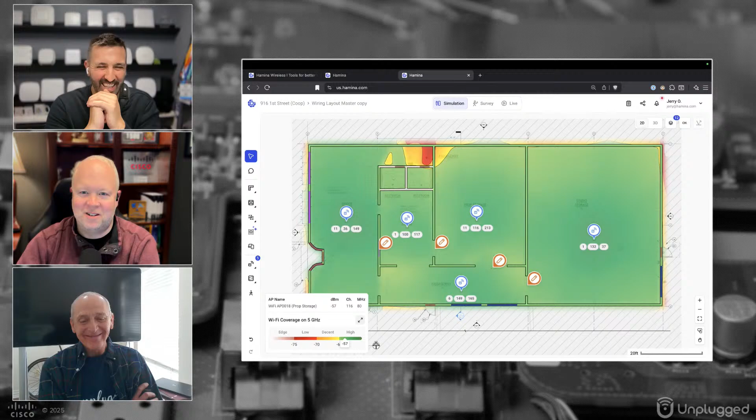That's nice. I just wanted to say your Initech reference didn't slip by anyone watching—there's a lot of comments about Lumbergh and TPS reports. Love it. That's awesome.

Alright, anything else good? I was just checking this question to see if there's anything else—yeah, we're at the bottom of the hour, so we probably better wrap it up. We'd love to have you back for another episode, Jerry, at some other point. Absolutely, this was super fun, super informative. My pleasure.